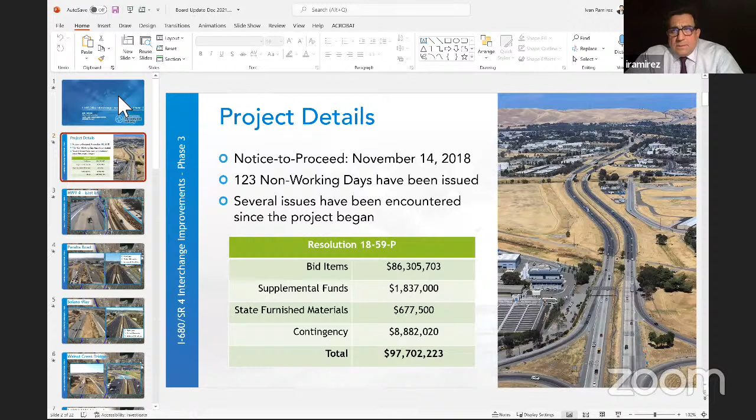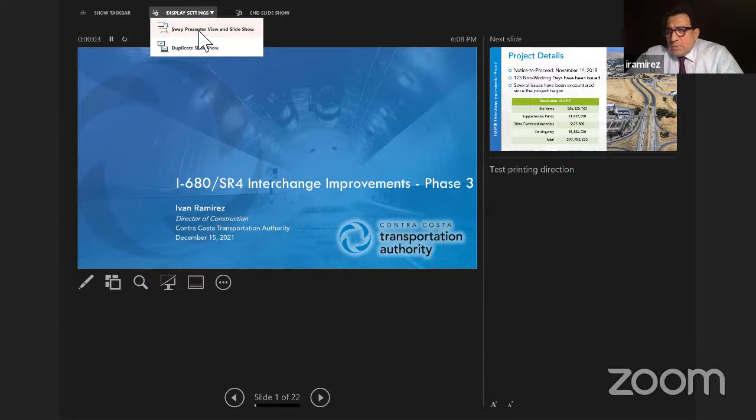Let me get my PowerPoint going here. Maybe I will share it here in a second. Okay, hopefully it'll be coming through here quickly. We can see it. There you go. Okay, apologize for that, it's always a little bit of a task getting this going.

The project began on November 14th, 2018. Since then, we have awarded 123 non-working days. What that means is the contractor couldn't work due to weather, primarily rain, and the days after rain since they cannot access the site because of the heavy mud and so on. There's also been some fog days.

We have encountered numerous issues, some of which I already provided information to the board a couple of times in the past, and I'm going to continue that today. Back in 2018, when the project got going, the board approved resolution 18-59-P, which provided a series of line items that totaled $97,702,223, and that was the total construction allotment for the project.

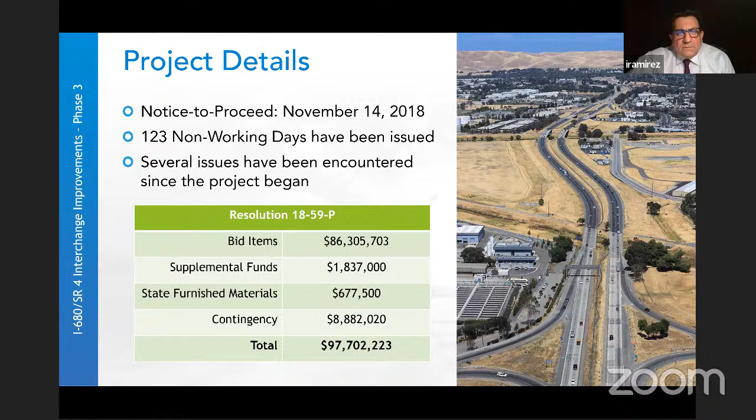I'm going to give you a little update on some of the things we have done. As some of you might have driven the project, you would have noticed that we're basically done. The facility is working as it was designed and scoped for. There are minor things going on the side of the road and also underneath the bridges on the local roads, but we're primarily done. This is at the east end.

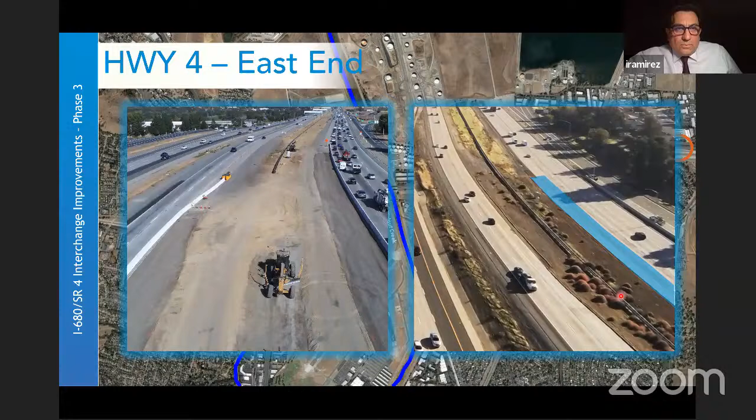We have an HOV lane going in the eastbound direction. The picture on the left is the status a few months ago when I came to this board and provided an update, and here on the right we have already completed that work. As shown here, this HOV lane connects to what was the existing HOV lane. That work is done and the public is using that facility.

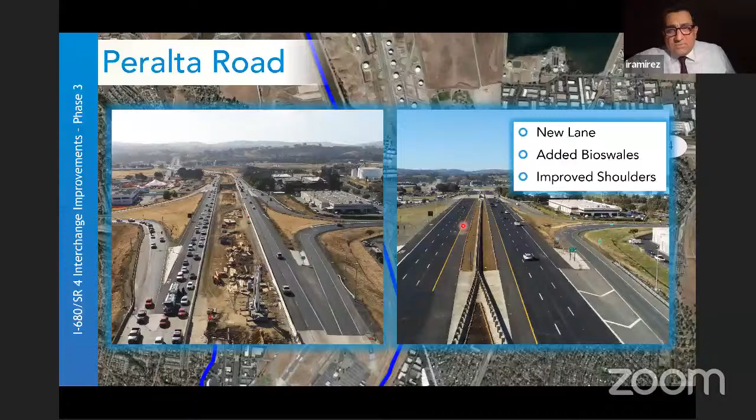Over at the Peralta Road, this is an image again on the left of what the project looked like last time I presented to this board. There was an issue here where the contractor couldn't proceed with the work because there was some damage done to the structure. Well, since then they have sped up, and now we have this facility here, and you can see again the HOV lane and also the third lane going in the westbound direction.

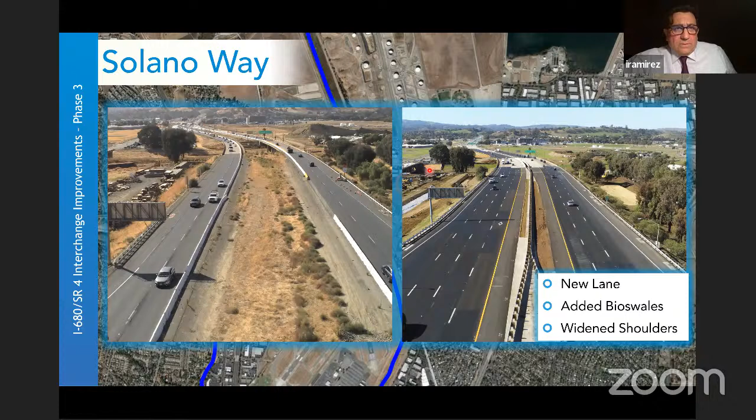Over at Solano Way, same thing. You can see how it looked in the past and how it looks now, with the bridge widening and the road widening as well.

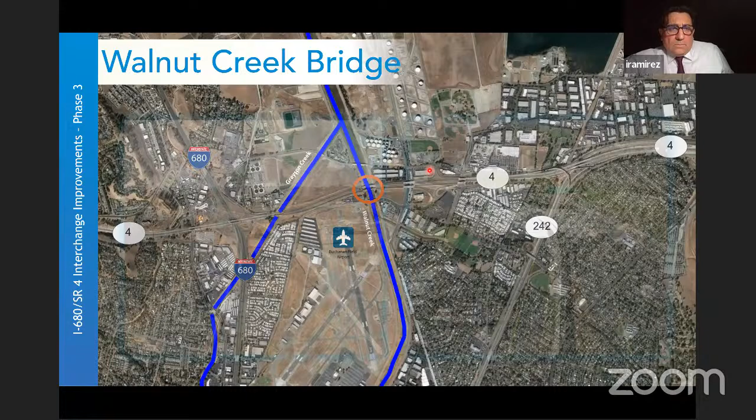Here is the interchange. We have made improvements on the outside, and we're also widening in the median. One thing to note here, commissioners, is that there is still this short weaving action with people coming onto the freeway heading in this direction and people coming off the freeway, and that's in both eastbound and westbound, and that continues to be a problem.

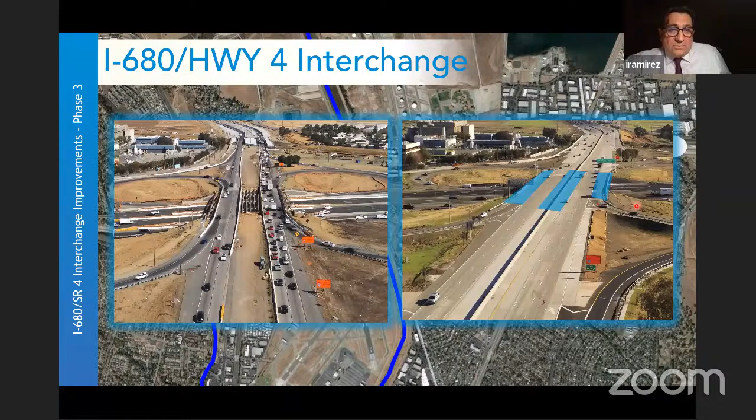We get a lot of questions from the public. In fact, I got one today asking when we're going to improve that, because that's the major flaw in this intersection. As I mentioned a few months ago, we're currently working on several phases to bring some relief to the public in a couple of projects. But funding is an issue, and we are working on that, and that continues to be a concern.

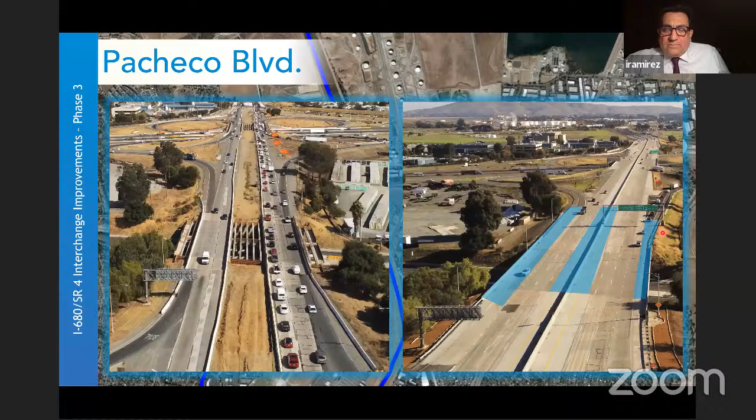That is also true over at Pacheco Boulevard. We have a similar situation, a short weaving action here with people coming off of the freeway and getting on, in both directions as well. So again, it continues to create a lot of concerns for the public.

I'm going to talk a little bit about some of the issues that we have encountered. One of the driving factors as to why this project has gone the way it has gone, and I'm going to talk about that a little later, is that it's 3.5 miles long, and we have 4 distinct interfaces with existing facilities.

We have the outside shoulders in both directions and the inside shoulders in both directions. At any one of those locations, there might be an existing structure, facility, or different site condition that doesn't allow us to progress with the work the way we would have liked to have done.

Here's a couple of examples where we have what we call different site conditions, where we show up and what is shown on the plans is not really what is happening in the field.

On the left side, we have an existing drainage system. In order for us to deal with that drainage system, we had to do some redesign, but one of the driving factors for the cost of that particular change order is the fact that all that work needed to be done at night.

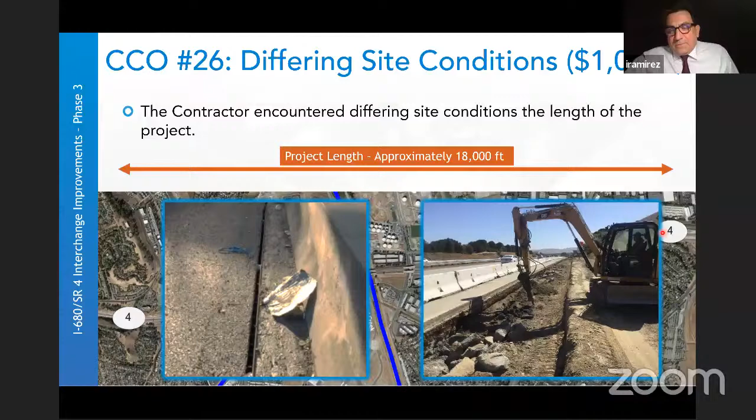So any activity related to get this work going, we had to pay the initial cost of lane closures. An example on the right, we have that condition where we're supposed to match the existing ground, but as you can see in that photo, there's a lot of debris that is underneath the road and adjacent to the road that has to be dealt with before we can continue with the work. So just getting this breaker in there, start breaking it, and also shipping it brings additional costs.

So just different site conditions alone is over $1 million that we have spent.

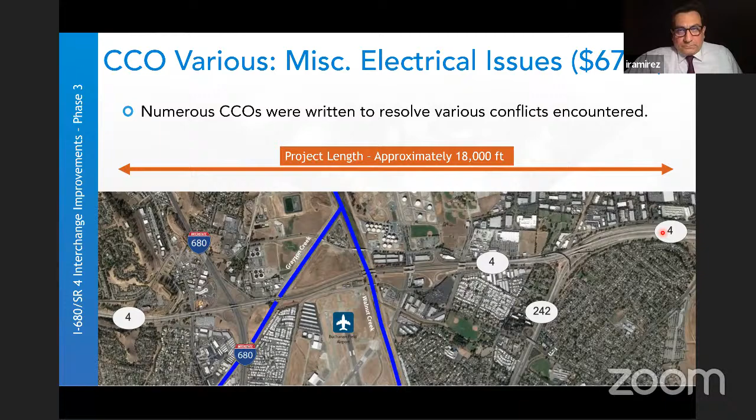There's also a lot of electrical issues. We have to install metal beam guardrails, concrete barrier rails. We have to install new drainage systems, and we have to install the electrical systems. And they're all on the side of the road. We plan the work, we show up, and then there's a lot of conflicts.

Over here on this picture on the left, there's a lot of an electrical system in here that was not shown. We have to deal with it.

One of the things that we have to do when we encounter electrical systems that we don't account for in the plans is that we have to go through the effort of investigating what that is doing, what lights or what signals or what traffic loops is actually being powered from that location.

So it's not just a matter of just going in there and saying, okay, there's a box here, let's get rid of it. It requires a lot of effort to get to the bottom of what we're going to do with that box. A lot of times they're abandoned, so we can just get rid of them, but a lot of times they're not, which means we have to create some bypass situation while we install the permanent work.

Here, this picture over here, we have a drainage pipe that's supposed to go underneath this metal beam guardrail. However, there is this electrical box, the foundation for this lighting, and the foundation for this cabinet that is in the way. That's another instance where we actually had to do pre-work before we got to the actual work.

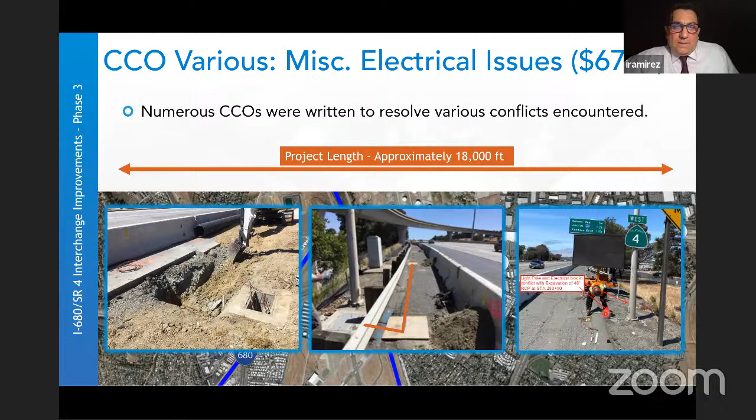We're trying to work with Caltrans to see how quickly they can take this off of our hands, because then it becomes their issue. But until that day comes, it's our responsibility, and it's an ongoing issue. I don't think it's isolated to our project. It happens throughout the Bay Area and maybe beyond.

In this situation, if these stolen wires are powering the lighting of the freeway, or traffic loops, or signals as you're coming off the freeway on the off-ramps, then they have to immediately be fixed. So again, this takes away resources from continuing with the work as we have planned. That alone is about $338,000 that we have spent remediating all those issues.

Not only do they hit crash cushions, they also hit metal beam guardrails, newly installed metal beam guardrails. They hit luminaires, they hit signs. There's also vehicles coming off the road and hitting drainage systems. It really is amazing the things that happen on the freeway. But we are responsible to keep the freeway in a condition that is safe to travel.

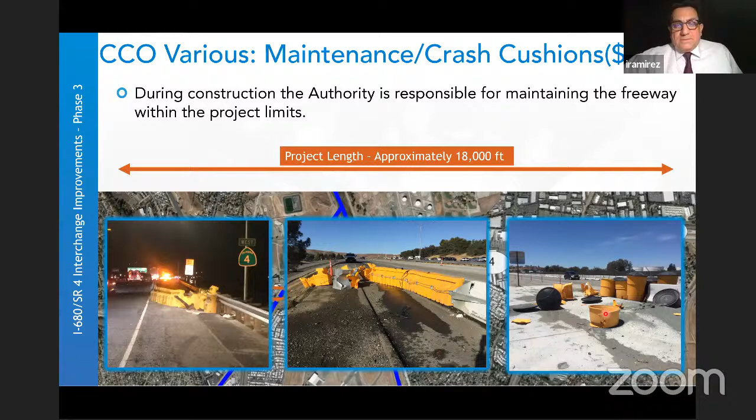So we come in the morning, we encounter the situation, and we have to fix it before we go to work. Or what happens sometimes, it happens on the weekend, it happens at night, and we have to mobilize the crews and get it fixed as quickly as possible.

Another thing that continues to plague this project is buried man-made objects. These are situations where it's concrete or other man-made objects left behind, and they have to be mitigated and taken care of before the work proceeds.

So here on the left, the section we were supposed to encounter was just a few inches, but as you can see, it's over 15 inches. That's additional work and also additional transportation costs. The picture in the middle shows a big concrete box, something we had to just get rid of. Again, that delays the project.

And these foundations here as well. So there are several things we have encountered throughout the project that are unanticipated and that we have to deal with.

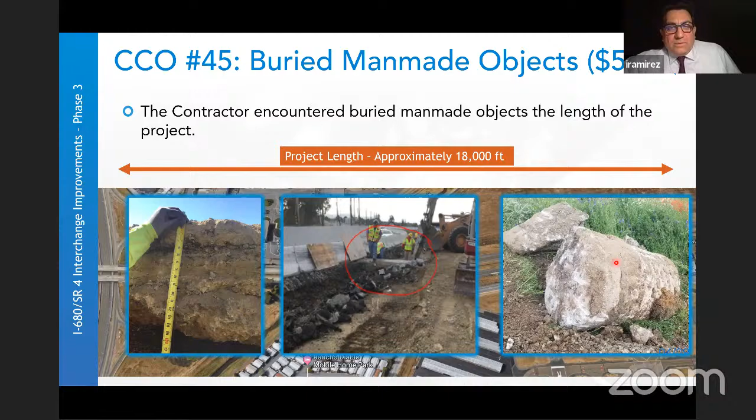This is an issue I brought up before, and it has to do with the fact that the design missed the transitions between different types of surfaces on the road. I want to point out that a lot of things are attributed to the design, and there are a few of them. It's important to note that even though we're fixing that during construction, that's still a project cost.

What I mean is that had we identified this issue during the design phase, we still would have had to pay for this work. Obviously it would have been under more favorable conditions, because it's a bidding environment, a competitive environment, whereas it's more expensive in construction because that's no longer the case. But nonetheless, it's a real project cost. I want to make sure that's understood by the board members, because we have spent a lot of money, but a lot of those things we would have spent that money on anyway, to a large degree.

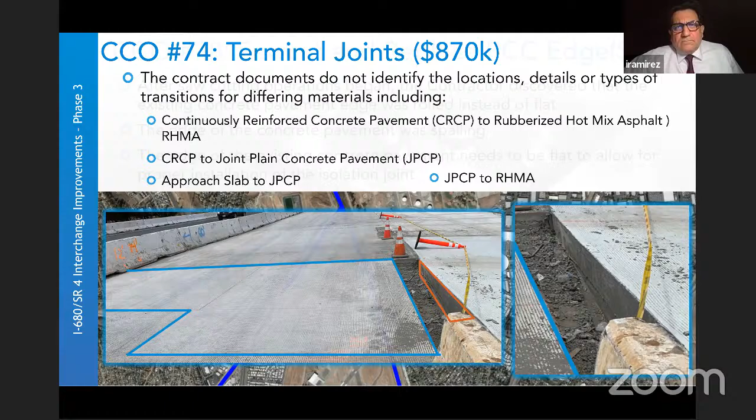I've also brought up this issue in the past, but I think it's worth bringing up again because of the cost. We're supposed to match up to the existing roadway, and that roadway is supposed to be neatly squared. Obviously that's kind of unrealistic, because the roadway has been there for many, many years and has some rounding to it. So we have to make it flat, from round to square.

In addition to that, we encounter spalls along the way. So it's not just the fact that it's a rounded edge - in addition to that, we have all these conditions where the road is deteriorated, we have spalls, and we have to square those too.

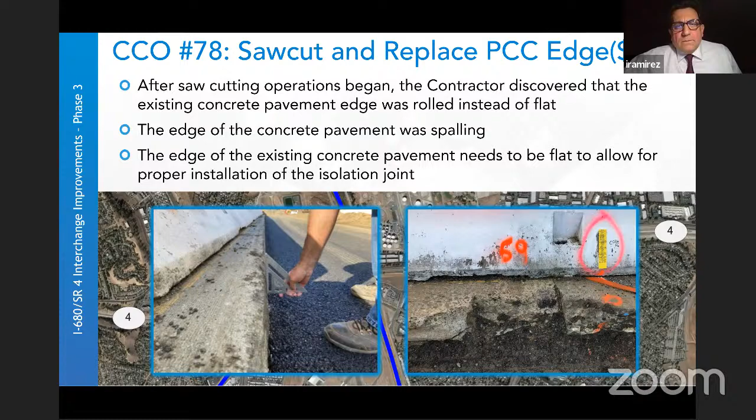One last example of some of the issues we've encountered - this is a design issue as well, where we have a bridge like we do at Grayson Creek, where we have a big angle between the creek and the road. We cannot have a condition where this here, called an approach slab, which is not actually part of the bridge...

Our plans called for it to be straight like this, but that is not the way it's supposed to be designed - you're supposed to have these steps like this. And of course, as you can see here, that requires additional effort and additional materials. But we fixed it, we did it right, but nonetheless, it's an additional expansion of the project.

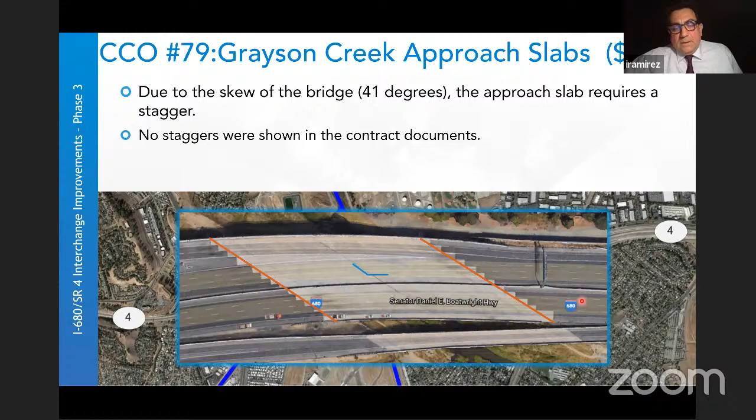Excuse me. And here we have basically a display of how the change orders are categorized. Most of them are differing site conditions. The other is primarily design issues, like I mentioned earlier, things that were missed but we addressed in construction.

There's a lot of issues that get brought up to us by Caltrans or the district or the Corps of Engineers or many other stakeholders that want things done a certain way. It's beyond the scope, but we have to do it. We spend a lot of money doing that.

Supplemental is primarily materials and equipment that we provide the contractor, California Highway Patrol, maintenance, we talked about that, all the issues we have to address. We also have spent some money trying to catch up in certain areas because we have fallen behind, and there's also a small amount of money for permits.

Before I conclude my presentation, I want to bring up an issue that's out there. The contractor feels at this point that they have not been compensated enough for the issues they've had to deal with, and they have submitted a package.

I took this graphic out of that submittal. Basically what they're saying here is that there's a significant amount of issues all over the project. So this is 680 here, and they just found out the location of each issue, where they have a request for information, letters they've put out to us about issues, and there's also a number of change orders.

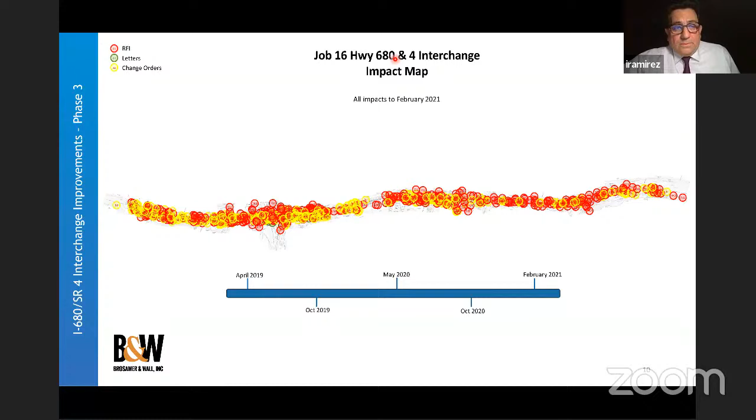Just wanted to bring it up to the board. So with that, I am open to any questions.

I took that down. Can you see everybody now? Okay. Yeah, as soon as I go back to my different view. Thank you very much, Ivan. Do any board members have questions, or commissioners? I see Commissioner Mitchoff's hand raised, followed by Commissioner Hudson.

Thank you, Madam Chair. And Ivan, thank you. Excellent. I drive that almost every day, and I sympathize with you with the calls you get from the public, but it's so much better than it was.

We're never satisfied, and what have you. But I see that our next item, you mentioned that Tim has been negotiating, is $2,073,000. I was just curious, maybe it should wait till the next one, but I'm wondering what their original ask was. I can appreciate that there's been all this, things that we didn't know would be there kind of stuff.

And I think whatever we've paid is worth every penny. Just coming, and I did it today, I was coming eastbound from Martinez on Highway 4, and just the addition of opening that lane instead of having to merge back into 2, it's been wonderful. So I'm just curious, that's my question. And if you think it's more appropriate for the next discussion item, I'm happy to wait.

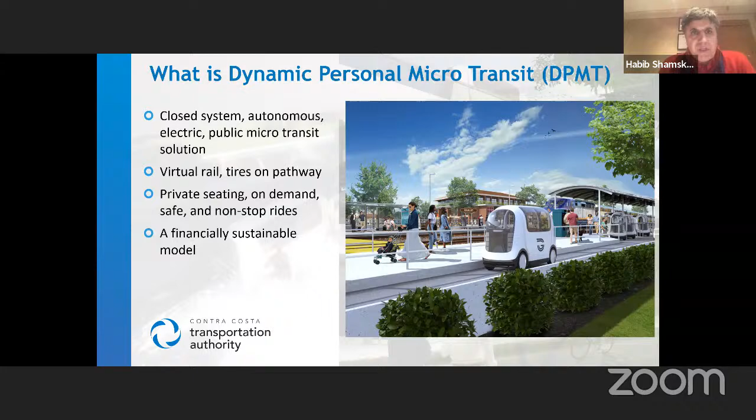Next slide shows the advantages of DPMT: economic development, and sustainability is the most important feature of this. It supports emission reduction goals of the CCTA. It provides transit accessibility for community of concern, it's a first mile, last mile connection and solution. It complements fixed route transit, it doesn't replace it. It is cost effective, requires a very small footprint, about 7 to 9 feet of width. It's safe, personalized, and can be used on demand.

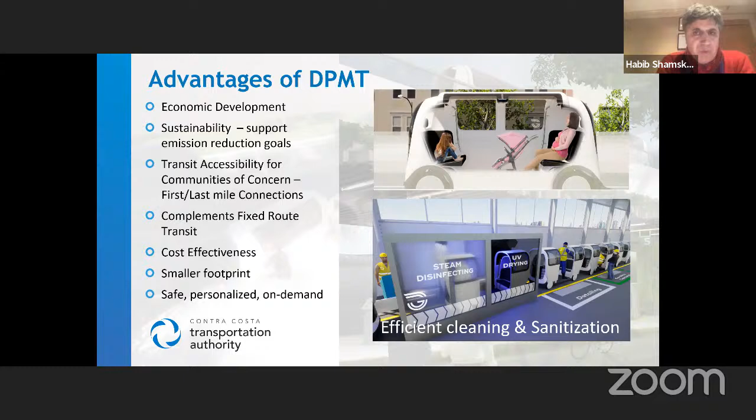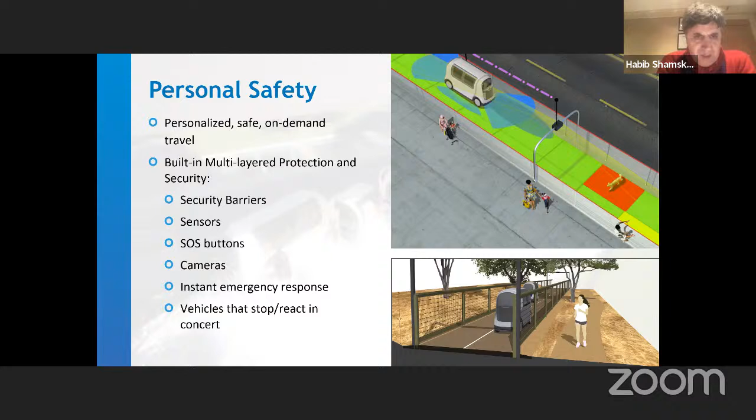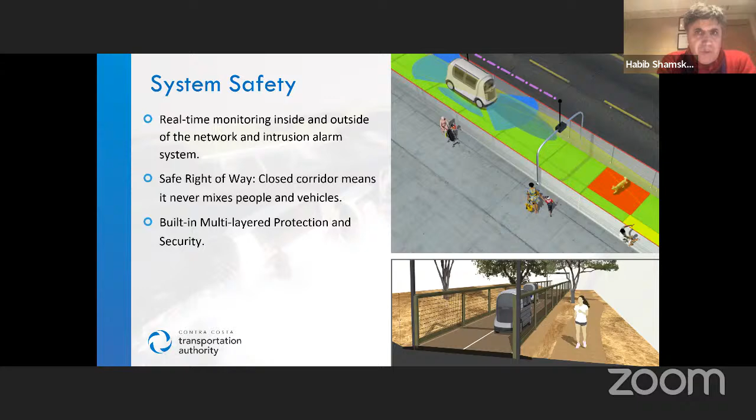I have to note that there are other DPMT systems in progress in the Bay Area and in California, including one in the Mountain View area near the Google campus. There is one under consideration in South San Francisco, and there is one in progress at the San Jose airport as well.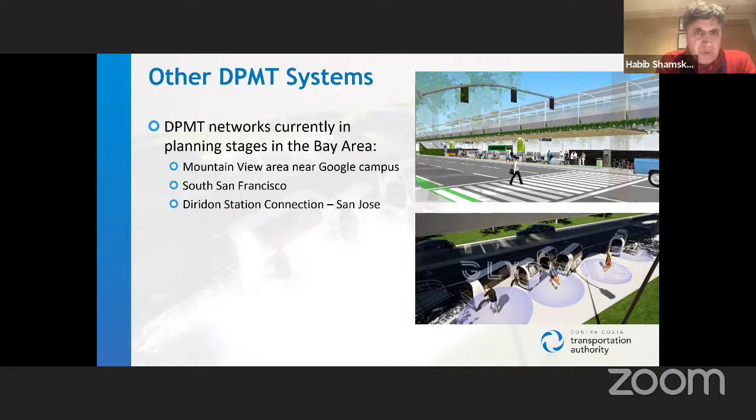So this feasibility study was conducted by five public partners in East Contra Costa County, including the cities of Oakley, Brentwood, Pittsburg, and Antioch, as well as Contra Costa County. Throughout the process, both Tri-Delta Transit as well as CCTA have been involved in development of the feasibility study as well. No major grant money has been used to conduct this feasibility study.

So the three simple goals of the project that early on all the stakeholders agree on: number one was to provide transit accessibility by building the DPMT system to provide first mile, last mile connection in East Contra Costa County. It provides accessibility to assure economic development and attract employers. The project is as much an economic development project as it is a transportation project. It evaluates feasibility to attract potential public funding and private financing, while opportunity is there with the private sector.

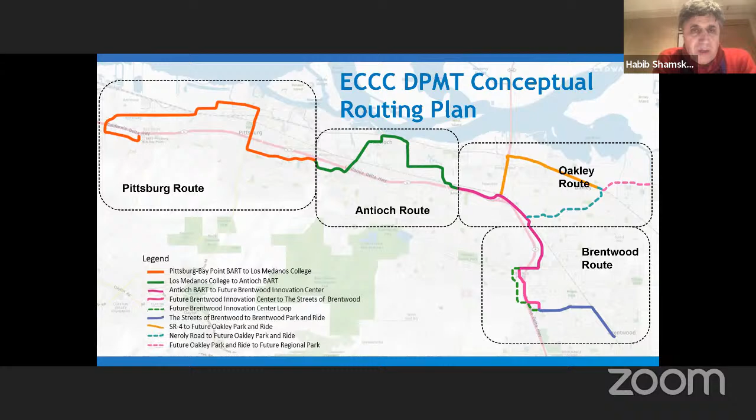So this is the network conceptual routing plan for the network that we worked on with the city's staff in order to accomplish this. By no means is this the final network. This is at the conceptual level, at the sketch level planning, to come up with a network that we can size the project with and continue our feasibility study.

As you can see, the network is well aligned with the major transportation assets and services within the corridor. It connects to all the BART stations. It includes 53 boarding zones and runs parallel to the SR4 in East Contra Costa County. DPMT complements existing transit, as I said before, and other active transportation modes in East Contra Costa County.

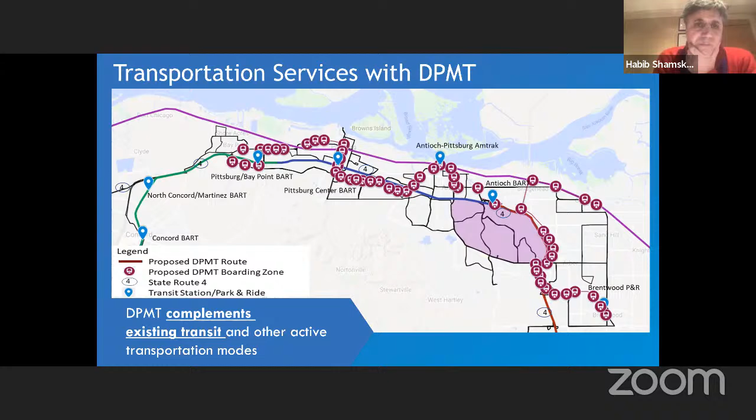So in order to know whether we do have a project that justifies further feasibility study, we needed to do a ridership demand analysis. We used the census-based LEHD to estimate potential trips within walking distance of the proposed boarding zones, added existing mode share and existing ridership trends, and used a logit model to estimate mode shift from drive-alone and carpool to the proposed boarding zones. We added annual growth plus planned projects to estimate 2030 ridership.

In the final analysis, we came up with 13 million potential demand, but in order to be extremely conservative, we cut it almost in half, to a 7 million annual ridership estimate for the demand for the DPMT.

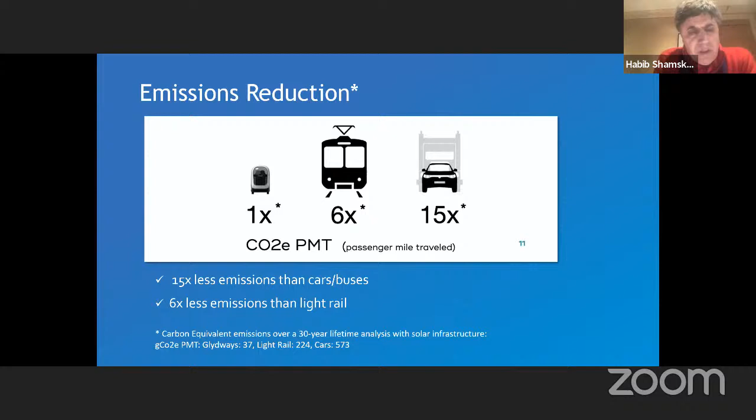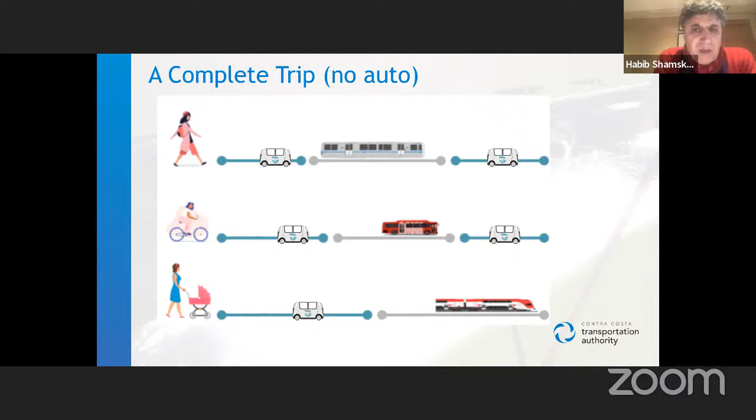So DPMT provides a complete trip without using your personal car. That means taking the unit to the commuter rail, and from the commuter rail back to your destination, as well as biking to the DPMT boarding zone and using fixed route transit, or walking to the station and using DPMT for the first mile, last mile connection to the commuter rail as well.

Some of the clear benefits of DPMT include supporting economic development and creating jobs by increasing mobility and connectivity. It is a congestion relief project with development of the first microtransit network, which results in reduction in VMT on SR4. It increases access for underserved communities. And as I said, it is a transit accessibility project for first mile, last mile connectivity, among other mobility options that CCTA is considering in Contra Costa County.

A few words about the financial plan. In order to complete our feasibility study, we have done that again at the sketch level planning. DPMT cost for the entire network ranges between $450 million to $500 million for the three major segments I showed earlier: the Pittsburg segment, and the Antioch, Oakley, and Brentwood segment.

So in order to take advantage of the P3 environment and private sector contribution, we are exploring private sector participation with private funding to finance the project, refinement of the cost estimate, and development of the phasing plan. At the same time, we are also evaluating grant funding opportunities for the project from many different sources of grants that are expected to come in 2022 and beyond.

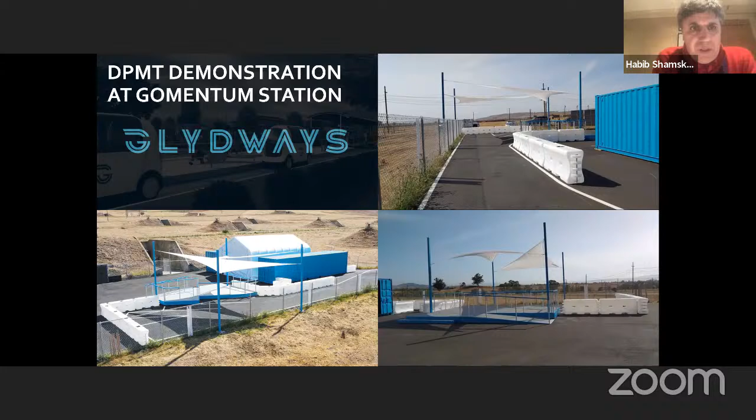Again, these are some of the pictures I've shown earlier. The next step on the project is that we are working to get additional industry outreach and input, a refined funding plan, and segmentation of the project. We are expanding the proof of concept at the Gomentum station. We started construction of phase 2 a couple of weeks ago and expect to finish in about 2 months. We are investigating the delivery option and P3 authority, and I'm sure in the next several months you'll hear from the executive director on this subject as we progress.

With that, that concludes my presentation, and I'd be happy to answer any questions you might have. Thank you very much, Habib. And I see hands up already, so hold on one. Vice Chair Kelly.

Yes, thank you, Habib. This is very, very intriguing. In terms of real-time use, I have a couple of questions. This Glydways goes along its own track, is that correct? Its own corridor, yes. And does it cross streets, like public streets, or no? It does cross — you have to have an overpass in order to cross the public street. So it wouldn't come in contact.

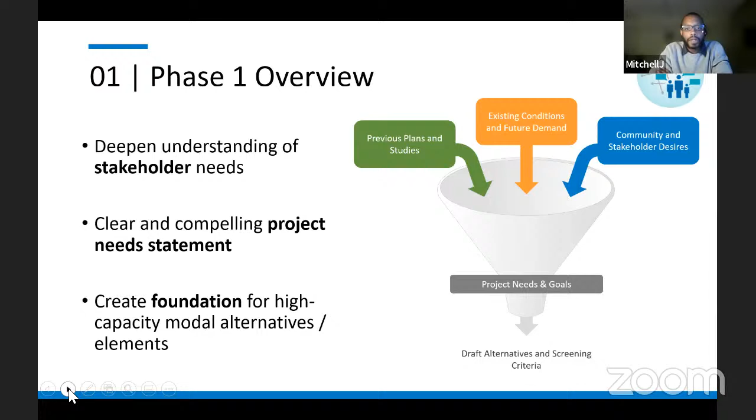So as we go into phase two, talking about how we refine those objectives and outcomes, the goal is really to get to a point where we had a reasonable set of alternatives that represented a good set of feasible and reasonable options from a transportation and mass transit perspective in East County. We took those needs and goal statements to say what kind of modes, guideways, amenities, other infrastructure, capital investments and service operating profiles would best serve the needs for mobility we're trying to address in the SR4 corridor.

And that's really from the alternatives development side of things. On the other side is the criterion, which is how we're going to evaluate them. The framework we developed looked at both qualitative and quantitative criteria to understand some of those more traditional hard-lined areas of evaluation from a cost, time savings and impacts perspective, but also some of the less tangible things in terms of the equity goals of the project, accessibility goals, and some of those things we heard from members of the community about what was more valuable to them, allowing relative comparisons of performance between the different alternatives.

So in certain cases, it was a little easier and more clear to do things in either a quantitative manner or a qualitative manner, depending on what kind of data was available and exactly how we were looking at comparing the performance of these different alternatives.

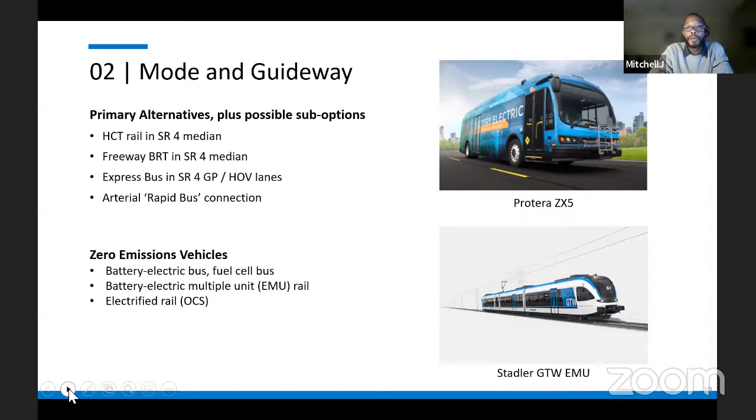So we tried to look at the multiple levels of capacity and dedicated space that could be provided for transit in East County, to get an understanding of the spectrum of how high capacity transit could and would perform given the different types of operating spaces and modes out there.

As we started getting into how these alternatives would function, what sort of treatments would be needed and where, we also identified critical infrastructure points and pinch points within the study area, including the SR 160 interchange, grade separations over the Contra Costa Canal and at Laurel, as well as how to connect specifically at the existing Antioch BART station platform, and being able to maneuver inside or outside of the median as needed based on the type of mode and guideway combinations we might have.

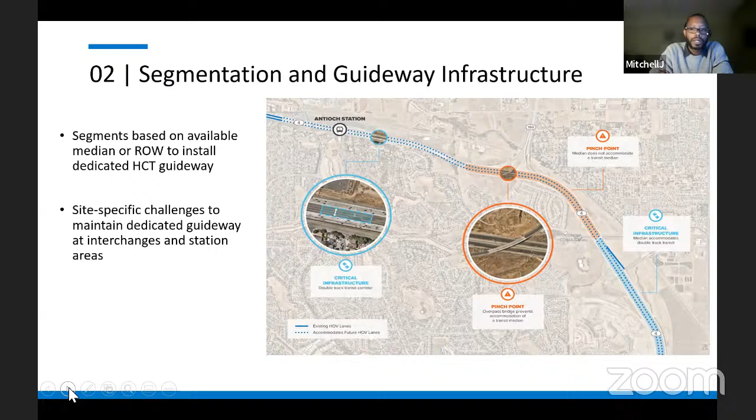There were also other site-specific challenges we addressed throughout the alternatives development phase, but those are a little more routine when it comes to constructability based on existing utilities, roadway network, connectivity, and things of that nature, station placements and footprints.

As we started stitching these different pieces together from a mode and guideway perspective, we also brought in the terminal station location and configuration - meaning is the station in the median, is it outside of the median, how would the vehicle have to connect to the station given where the platform was placed, and even where the terminal station would be.

This is a bit of a nuance when you look at the western terminus and we talk about why the western terminus may or may not be at Antioch.

Primarily, this came up as we started defining where we could put a dedicated running space in the median of SR4. For example, if we had a dedicated median guideway for buses, or I'll start with rail - if we started a dedicated median for rail, it'd be very directly connecting to the existing Antioch station platform.

Very little in terms of connectivity at the station platform location directly for the interface, being able to run service continuously through Antioch all the way to Pittsburg Bay Point to make the transfer to BART there for trips further west. So that would really allow that one seat ride from a rail perspective.

From Brentwood to Pittsburg Bay Point in the median. When we started looking at the BRT and freeway BRT operations in the median, that was a very different situation.

We could not have the buses directly dock and do their boarding and alighting at the existing Antioch station in the median. We would have to take the buses out of the median at some point to get them to the north side of SR4 and into the existing bus bays outside of Slatten Ranch Road at the BART station, and have their regular interface and circulation there where the rest of Tri-Delta's fixed routes dock currently.

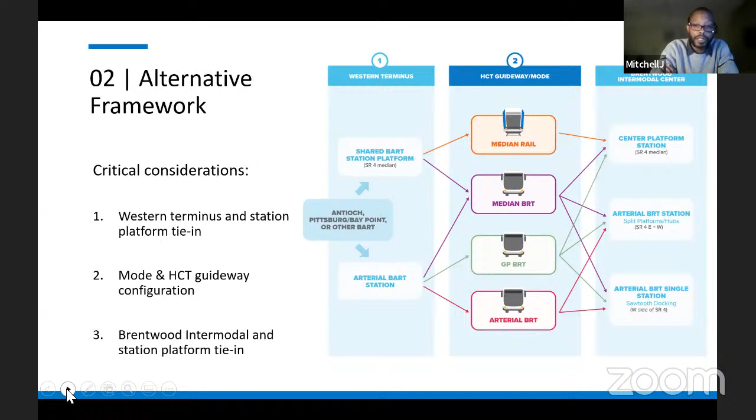So all that to say, we tried to look in detail at the operational considerations aligned with the different capital improvements we might have, understanding whether they were or weren't feasible. Because of that, we ended up with a couple of permutations on that western terminus, where we took a freeway BRT all the way to Pittsburg Bay Point, as well as an express bus in the general purpose lanes. We'll see all of the alternatives in just a moment.

As you saw, those different lines connecting the different permutations of western terminus mode and guideway combination, and eastern terminus and configuration, there were over a dozen different potential options that we ended up with when we started looking at what we could potentially do.

To narrow those down to a reasonable and feasible set of alternatives to define and evaluate in detail, we did a fatal flaw assessment, which looked at constructability, safety and security, compatible operations with other modes—meaning transit, multimodal active transportation and auto—jurisdictional and regulatory concerns, whether federal, state, or local, Caltrans or the cities, as well as whether there were redundancies between options, where one alternative was not very different from another but was potentially much less cost effective. In that case, we would not move the less cost effective alternative forward, and would only take the one that was more cost effective but still represented the same level of service and treatments.

So using those fatal flaws, we came up with a set of 6 final alternatives, and we also refined the criteria we were using to evaluate them. These are the 6 alternatives.

We had a BART rail extension from Brentwood to Antioch in the median. We had 2 freeway BRT options, which operated in their own dedicated space also in the median of SR4. The freeway BRT to Antioch went directly to Antioch with a direct connector flyover ramp, essentially, that took it out of the median—either a flyover ramp or a tunnel option for number 2 to get it out of the median.

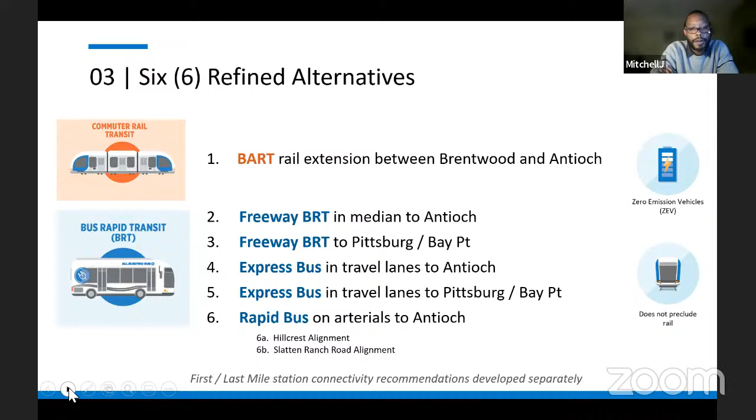These are the evaluation criteria we used to compare the relative benefits and impacts of these alternatives. I'm not going to read the descriptions to each of you, but I'll be happy to answer any questions on them later: travel time savings, the comfort and number of transfers, how it provides access to the communities in East County, Brentwood, Antioch, and Oakley, what the relative costs of using the service were depending on your destination and how you were accessing it, what the ridership potential and emissions reductions potential were, and how many people it could carry.

The final 6 criteria look at the flexibility of service, meaning how well it could operate inside or outside of a dedicated space, inside or outside of SR4, or beyond any of the initial termini we identified. How well did it preserve space for transit operations exclusively, meaning dedicated right-of-way? Did it support a future rail extension? How long would it take to implement? How did the community feel about these alternatives? And what was the relative cost effectiveness of capital and operations, including recurring operating cost of the service? Each of those evaluation metrics was looked at in detail, and we ended up with a transparent scoring system and rating system that Thaddeus is going to run through with you now to take you through the results and final recommendations.

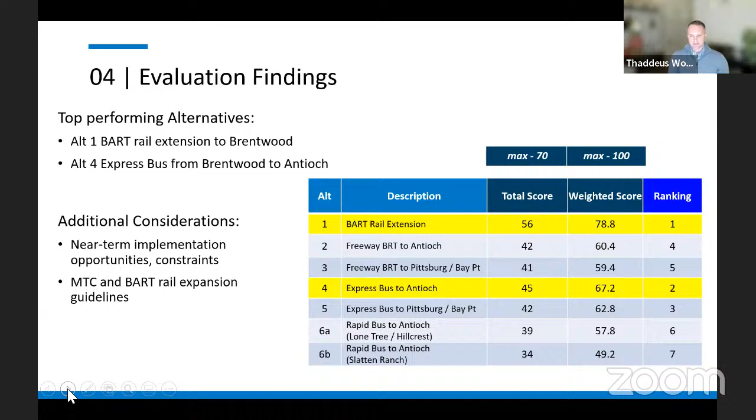This slide highlights where alternative 1 and alternative 4 differentiated from the other alternatives. Alternative 1, the BART extension, scored well in terms of reduced travel time, increased ridership, increased capacity, and a reduction in emissions. It also provided dedicated space for transit within the SR4 median and is compatible with a future potential rail extension.

Drawbacks to the BART rail extension alternative include a much longer implementation timeline and higher construction costs. The rail extension also requires additional station densities than what's currently planned in the area.

Alternative 4, the express bus to Antioch, scored well by being a low-cost alternative with a shorter implementation timeline. It also provided near-term service flexibility and opportunities to extend service into the future. Drawbacks included lower ridership, lower capacity, and less emissions reductions than the rail alternative. It did not create dedicated space for transit in the SR4 right-of-way, but also did not preclude that space from being allocated to transit in the future.

So as shown here, at the end of our evaluation, we are not recommending the BART rail in the SR4 for near-term implementation, even though it was the highest scoring alternative in our evaluation process. We are recommending the express bus alternative for near-term implementation.

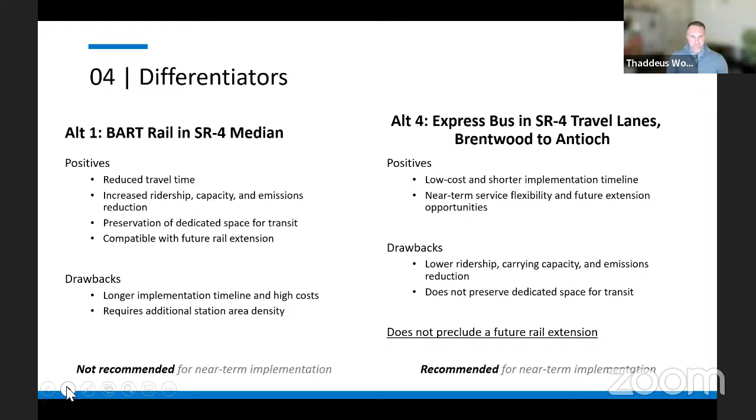Both MTC and BART have policies around system expansion. MTC Resolution 3434 applies to any physical transit extension project that would use regional discretionary funds, and it quantifies appropriate minimum levels of development around transit stations along new corridors. For a BART extension, the minimum number of housing units within a half mile of the station, according to MTC Resolution 3434, is 3,850 housing units.

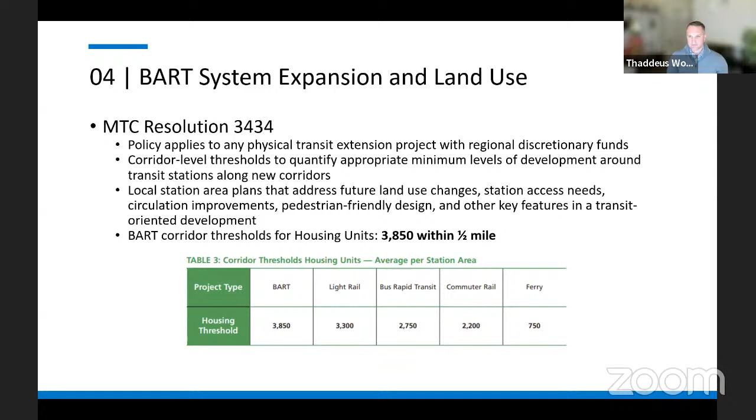BART also has a system expansion policy, which was released in 1999 and is currently undergoing an update. The existing policy looks at both residential land use and employment land use, then looks at existing housing units and commercial square footage within a half mile of the station.

When we compare these thresholds to the proposed development at the Innovation Center at Brentwood, the proposed housing would receive a low rating based on the residential, and a low-medium to medium rating for the employment land use category.

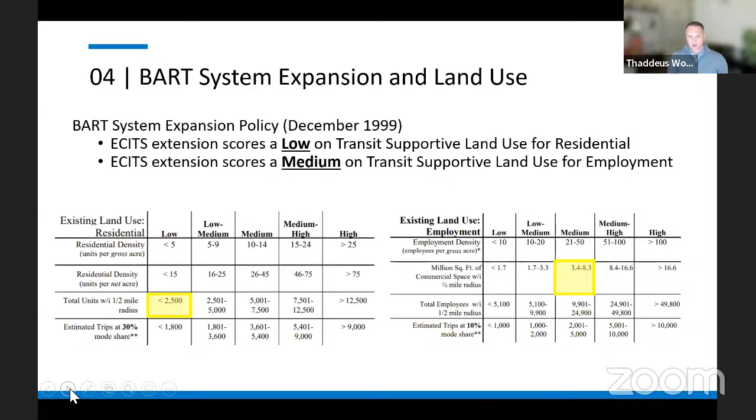Existing and planned development within a half mile of the proposed station includes roughly 250 existing residential units, as well as about 2,000 proposed residential units at the Innovation Center at Brentwood. There's 4 million square feet of proposed commercial space at the Innovation Center. However, if you look at the graphic on the right, the blue circle, a portion of that is located outside of the half mile radius from the station.

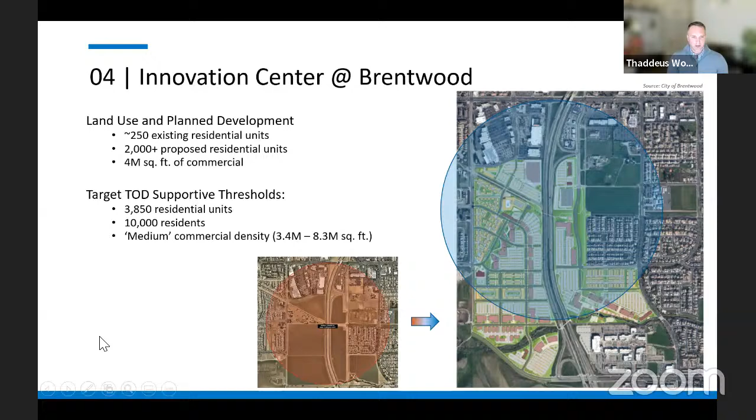Approximately 1 million square feet of that 4 million would put the proposed commercial square footage really close to that threshold of 3.4 million square feet, between the medium-low and medium rating on the employment land use side.

As anticipated, capital costs for the rail extension were much higher than the bus options, with the express bus alternative having the lowest overall capital costs, as well as the lowest capital costs per rider by a significant margin. There isn't that much of a spread in the total annual operations and maintenance costs between the alternatives, but you can start to see a difference in those costs when you look at the annualized O&M costs on a per rider basis.

We also looked at travel times and travel costs from Brentwood to Walnut Creek, Oakland, and San Francisco. All of this went into the evaluation process, but for simplicity, we're only showing the metrics from Brentwood to Walnut Creek in the presentation. All alternatives had shorter travel times from Brentwood to Walnut Creek than driving, and the travel time benefits of transit became even larger when we compared travel times to Oakland and San Francisco as well. The anticipated user costs for all of these alternatives was less than driving as well, by a significant margin.